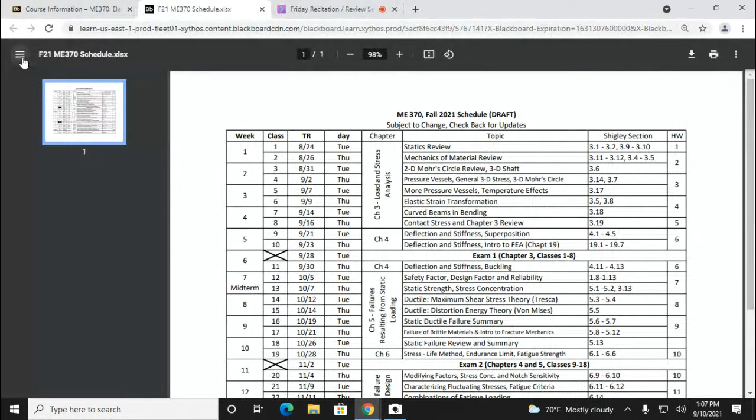Look at all those pictures of books. That's fun. I don't know if I get credit for that. Do I get credit for, is that a credit type of thing?

Right here is our schedule, so I've been sticking closely to this. Our first exam is scheduled for Tuesday, the 28th. What are we today? We're like right here, right? So it's several weeks away. It's only going to be on chapter 3.

We just started talking about elastic strain transformation and we're going to do curved beams. So next week is really curved beams, contact stress might be a short thing. And then deflection and superposition, and we'll start using FEA right here. So that's where my plan is for it.

And we'll use the review session that's right here on the 24th. That's going to be the exam review session. We might get a different room so that we can make it longer, because I think more than an hour is needed.

I won't pull any punches, people bomb this first exam. I mean, just historically. I created this review session because I don't know how else to address this problem that I know exists, and I really want to. I'm very highly motivated to fix what I see as something that's broken. So we got to work together to try to do that. And the number one way to do that is to solve problems.

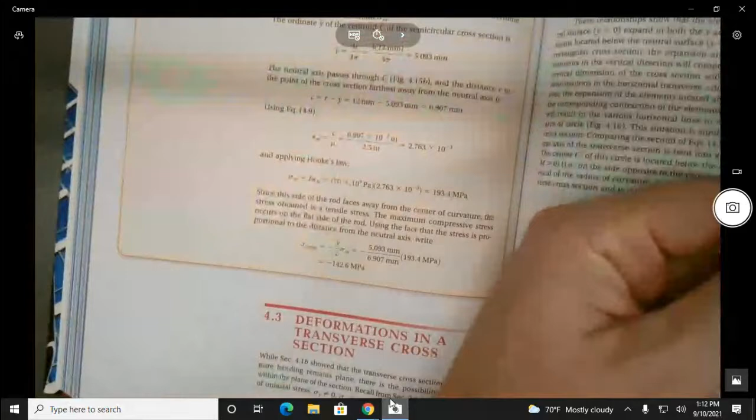I'll find a problem, and this is something I'm doing with a purpose in mind. I'm randomly looking for where that part is in Beer-Johnston, this is just an awesome textbook right here, by the way. Dave Mazurek, I know Dave Mazurek. Name dropper, that's what I am.

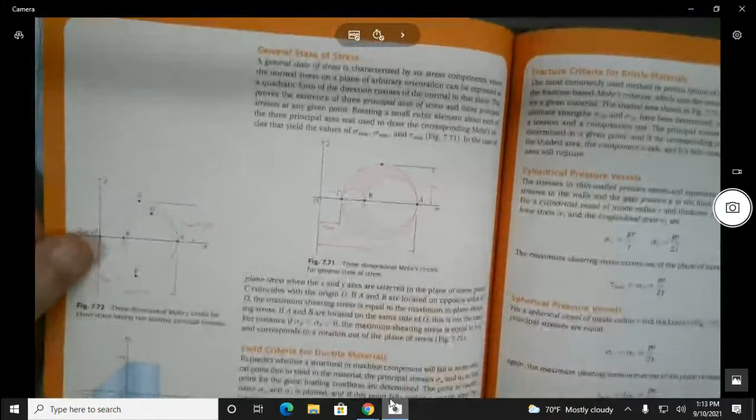Okay, let's see, it looks like here is a Mohr Circle problem. And here's where they actually talk about 3D Mohr Circle. So isn't that something else? So let's see, let's find us any more problems. They got problems in the back here.

Let's check them out. Here's one right there. They're trying to determine the value for which the maximum shearing stress is, but they're going backwards in a problem like that. We don't need to do that.

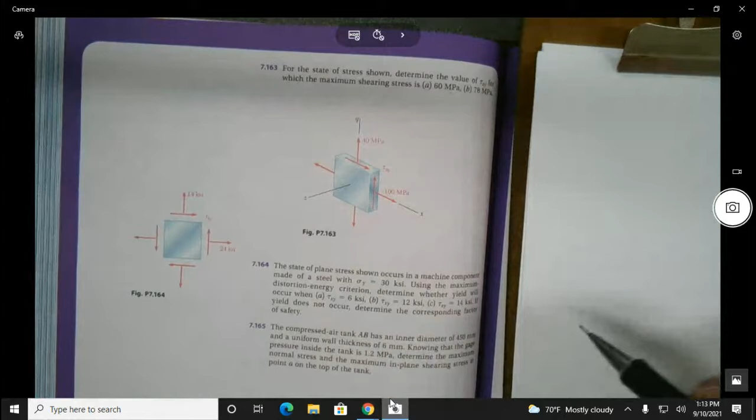Let's do a different one here. The state of plane stress shown occurs in a machine component made of steel using the maximum... oh no, that's chapter 5 stuff for us. So let's go a little earlier and just pick out one.

We could actually just make up values if we wanted to, but for whatever reason they're doing something in some of these problems where they're working backwards, which we don't need to do. All right, so here's one right here, just because I don't feel very creative today.

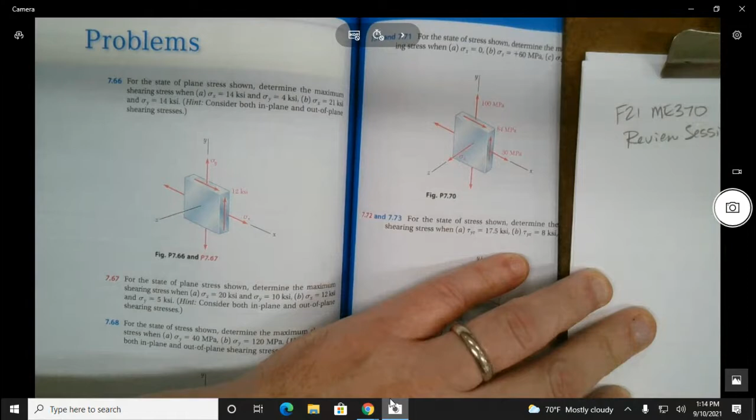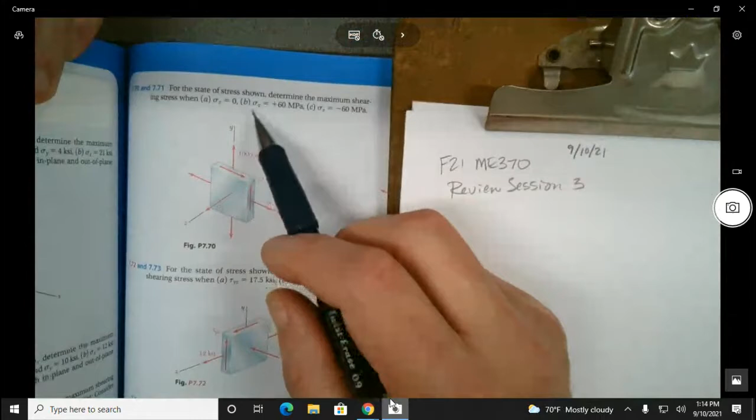For the state of stress shown, determine the maximum shearing stress when sigma z equals zero. Oh, this is interesting. They're doing the 3D Mohr Circle thing right here, with these three different scenarios. Okay, that's good, I like that.

So they've decided that we have this one right here, and they decided to give us this weird looking figure right here. Well, they decided to make it that way.

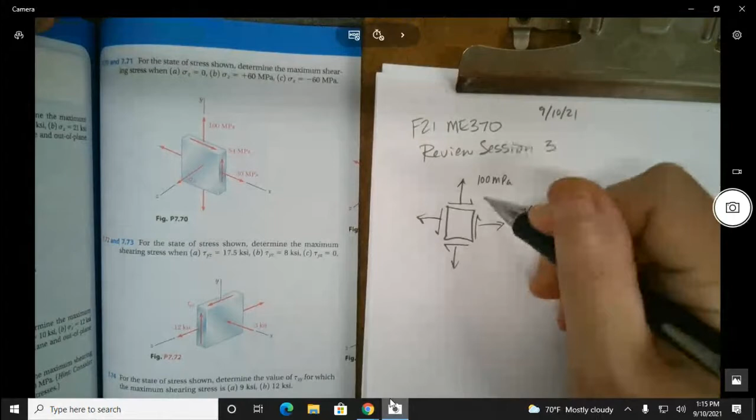100 megapascals, and here is 84 megapascals. And they also said for part A, the Z direction is 0. For part B, the Z direction is equal to 60 megapascals, by which they mean tension when they say positive. And then C is 60 megapascals compression.

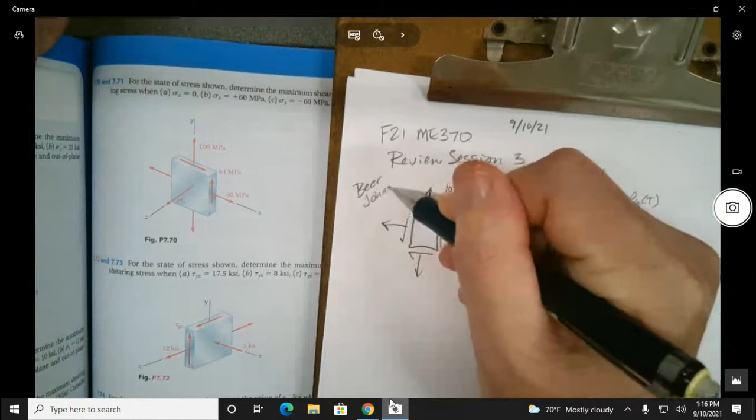This is Beer Johnston 7.70. You do that because honestly, I keep these things and go back and think, where did I get that from? All right, so we'll use the handy dandy ruler.

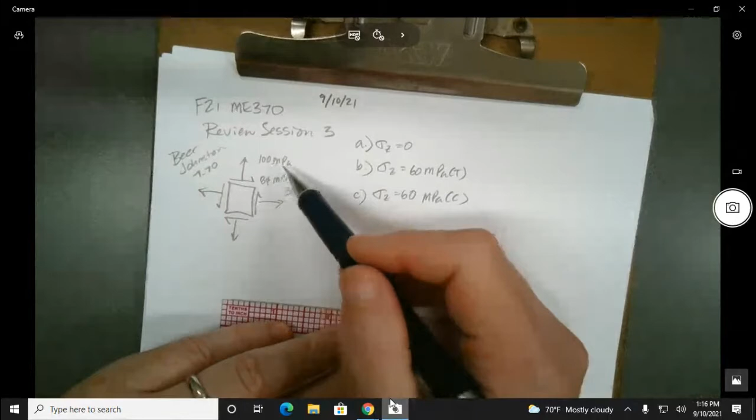Why not? First off, I'll make a nice straight line, and we got 100 as their largest one right here, so I don't want to use the whole page for 100. Let me go like this.

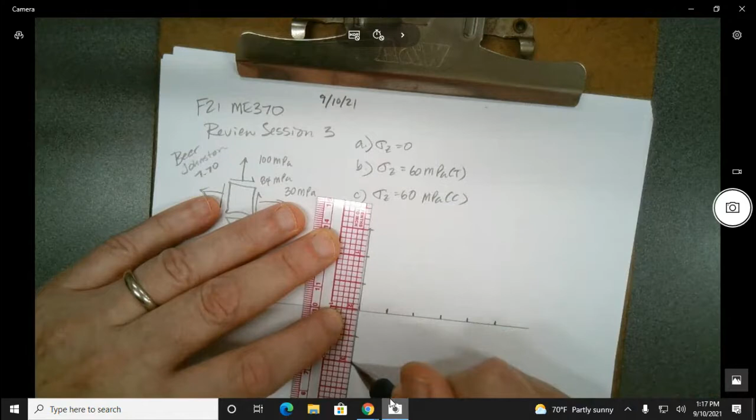I'll go 20, 40, 60, 80, 100 right there. I think I got that right. I didn't make this very perpendicular to each other, so there's 20, 40, 60, 20, 40, 60. I think we'll be okay there.

Although they have 80, don't they? Yeah, I might have messed up by making that so low. We'll just do our best, because this is 84. Let's see what happens.

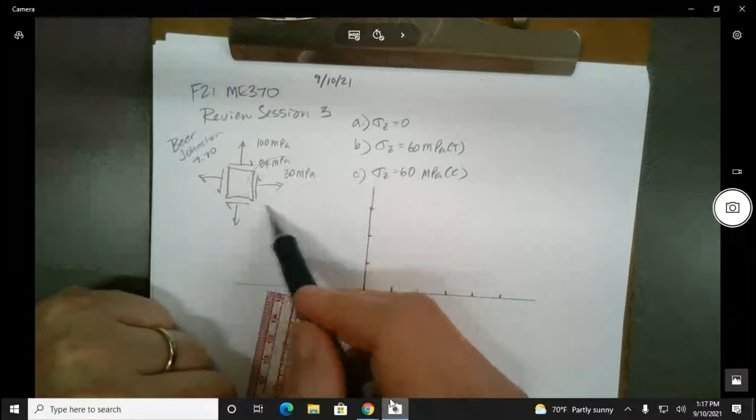All right, on this first face right here, we want to plot that. So we take 30, which is going to be right there, right? And 84, and the 84 is going that direction. So onto this one, let's see, here's... as I mentioned, I should have probably gone out a little before.

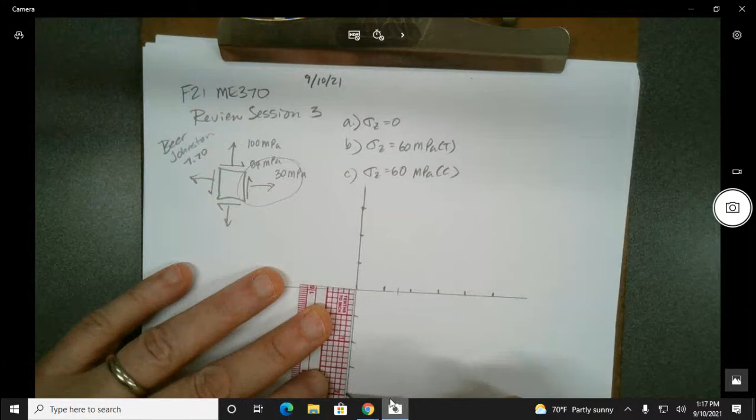Let me see, 20, 40, 60, 80, 100. So 84 is like right there. I'm sorry, right there? Is that okay?

Okay, and then on this other face over here, we got 100, 84, right? So here was 20, 40, 60, 80, 100, and 20, 40, 60, 80, 100. That's kind of ridiculous right there at that point, but okay.

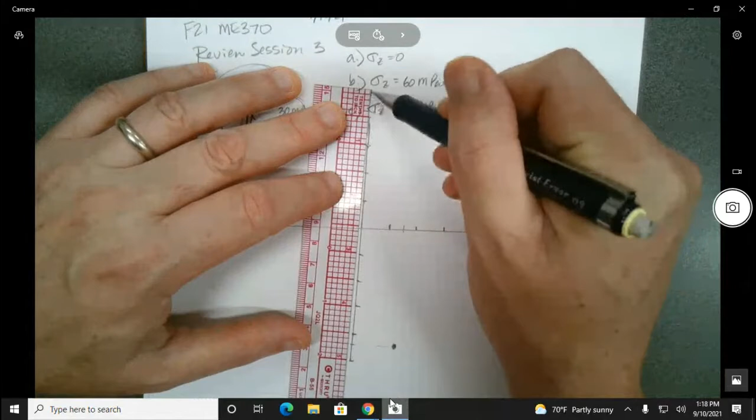Oh, actually, I probably did that kind of bad, right? So it should actually be a little upper, because halfway through would be 90, so we probably go like right there, yeah. So this might be a little better, I don't know.

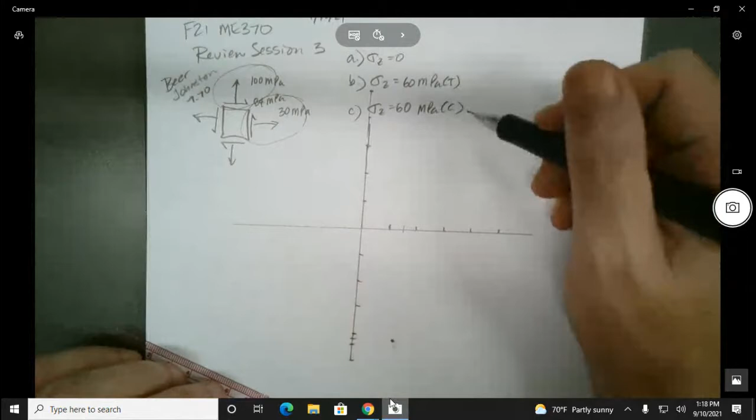And this one over here is going to go and be up here somewhere. There would be 90, so maybe right there.

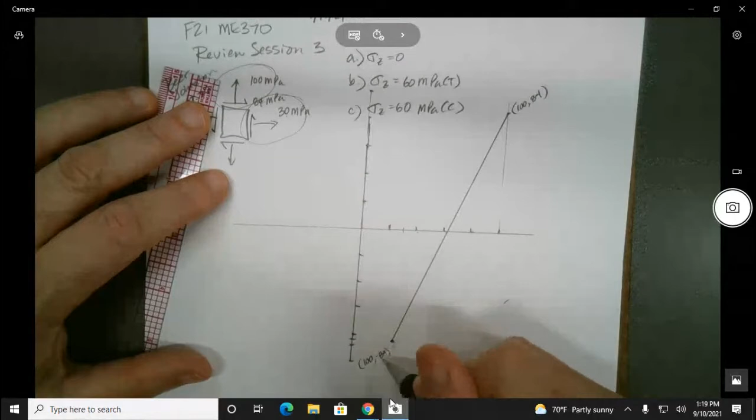So yes, this should be 100, 84, and this is 100 and negative 84. Not 100, that should be 30. Thank you, keep me honest.

And I guess I can attempt to use my... it's a little, kind of a better one than some of the others, but this is like loose right here. It really kind of messes with me.

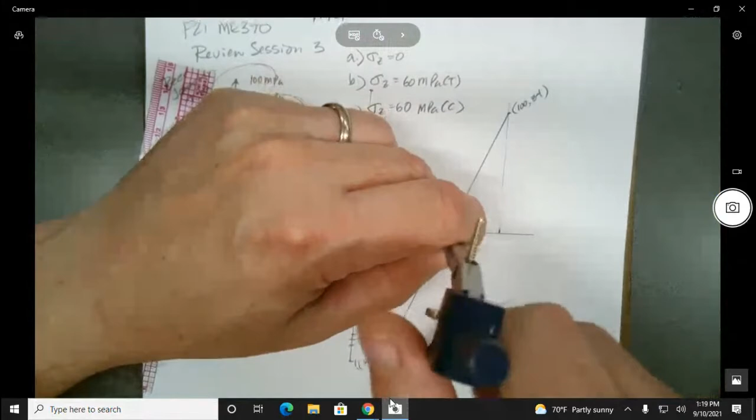And what's 100 plus 30? That's 130, and half of that should be what, 65? So I should have landed, the center should land at 65, so I can kind of show you how bad my improvised graph paper here. Didn't do a great job, but here.

So there you go, we made a Mohr circle. And we could extend this thing out here. I really should have probably used some engineering paper, right? That would have been better.

But let's go for the center of this thing first. The center of these points is going to be 100 plus 30 divided by 2. Let's see, so we already said that, 65? Yeah. Now the radius of this, okay, so we got to pick a spot for the radius. Here's C, let's get a label of that.

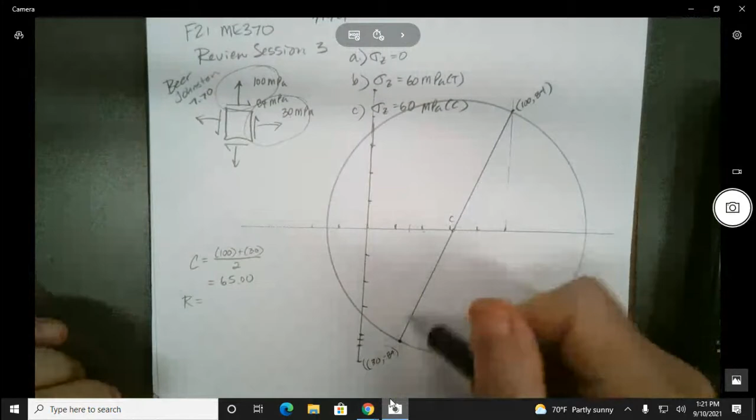I'm going to pick this guy right there as my radius. So this length right there is going to be the center, 65, minus 30. That's going to be that length right there. And then it's just going to be this high, which is 84 squared. 65 minus 30, I could do that in my head. It's 35? Okay, you have to double check for me though. John, math.

All right, so I get that that's going to be 91.

So my sigma 1, sometimes I call it, well maybe I'll call it sigma A. We'll call it sigma A. We'll keep doing that here just for a second because I might want to mess with that right here. Is going to be C plus R. So whatever that, 65 plus 91 is 156 megapascals. That's going to be tension for sure. So that's that guy over here.

Just have a question, quick. If you found the radius for the other side, the center point would be 100 minus 65? Yes, okay, yeah absolutely. Yeah, this leg would be 100 minus the 65. You do either one, doesn't really matter.

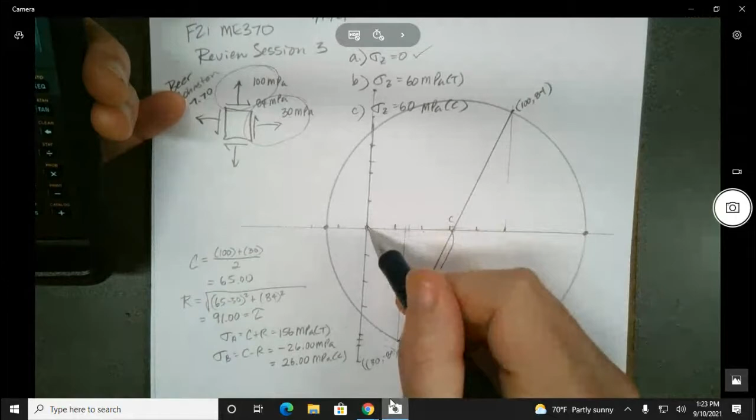Now we have to do the 3D Mohr circle aspect of this, right? Now that we got the principal stresses, we also know that this right here is going to be tau. It's this in the first case up here. This ends up being sigma z equals 0 right here, one of the principal stresses.

So we have that guy, and then, wow, actually feeling pretty cocky. No, wasn't great. Started off, it felt pretty good when I got to right on there. I started feeling like my circle skills were doing okay, but then it all fell apart.

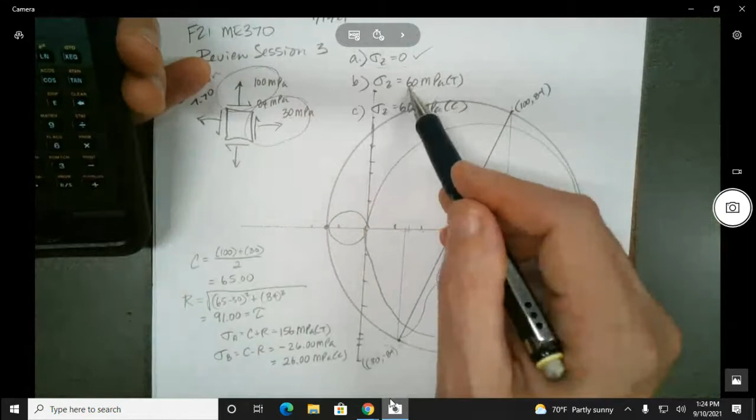So that would be this first answer right here. Now we have another one here where we have, okay, so 60. What if 60 was something that was happening in the z direction?

And so probably the thing we care the most about when it comes to what's going to happen here is what the absolute maximum shear is going to be. And in this situation, it's the first one, it's going to be this guy right here, abs max. And that's just equal to the radius, that's going to equal 91.

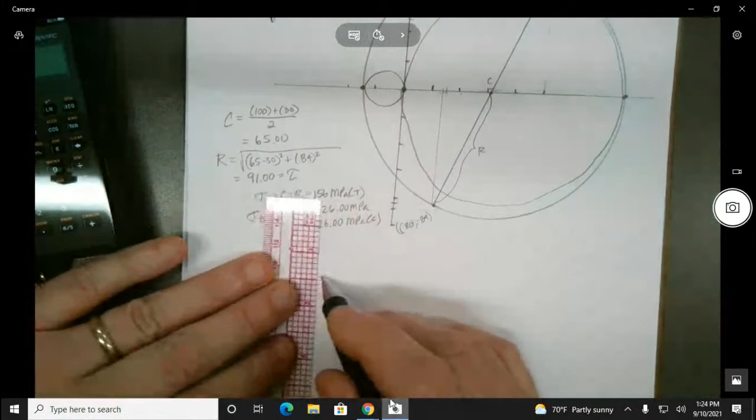But now we have these what-if things for B and C. So I'll just draw them below. All right, so we have all of the same stuff. The principal stresses are still going to remain the same, sigma A and sigma B. Now let me see, I'll draw it a kind of smaller version of the thing.

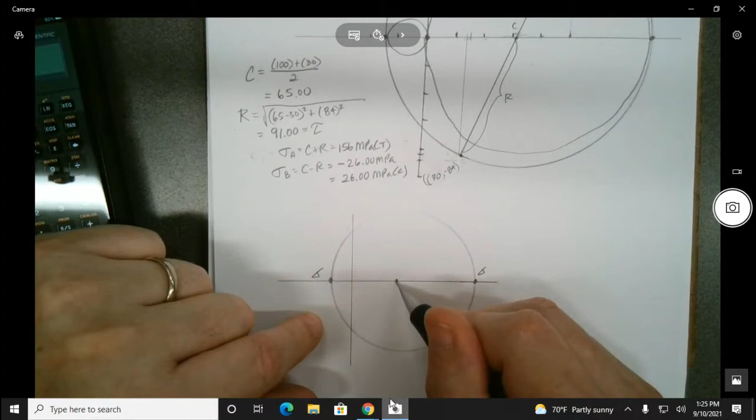So now we're going to say right here, and I'm just going to try to mimic what we had there, something like that. So I guess I'll use another piece of paper here for the other one. And so we still have this guy and this guy. But now, if the other principal stress is 60, it would look pretty close to being right there. I'm just estimating, this was like the center of this was 65, but now this is like right here, so we would have a Mohr circle.

If it'll let me do this. Let's see, I'm gonna do my, oh it's doing that thing where, I hate that. No. I'm eyeballing this. Eyeball engineering. Ah, I messed it all up. Let's pretend it looked okay. We'll do pretend.

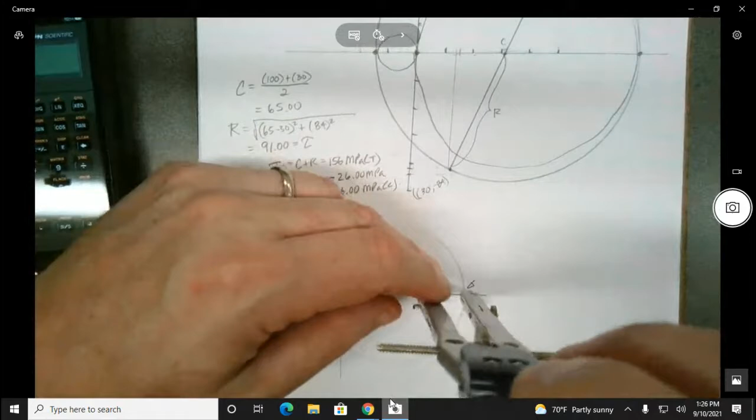All right, so now this is sigma 1, this is sigma 2, and this is sigma 3. Sigma 2 would be that 60 megapascals in tension, right? So this guy was the 156, and he would be the 26, right? Yeah, 26. With these compression over here. Not any big difference. And the tau abs max, still the same.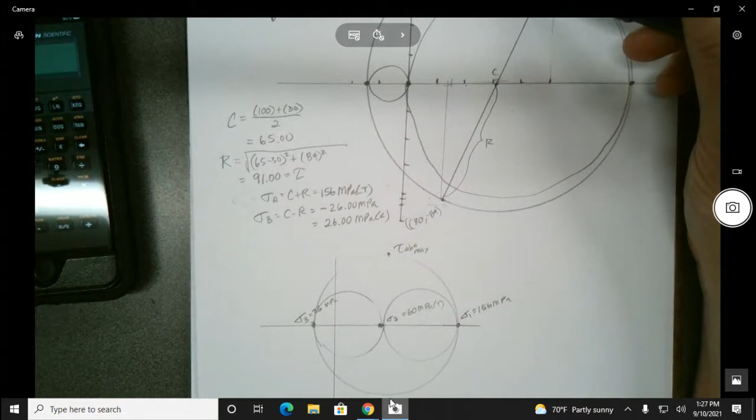But now for this other thing that they were talking about, I'm sorry. The other situation where we have 60 is the out of plane, that's compression, right? You can't quite see it.

Let me see if I'll go. I can't go up any higher. Yes sir. Okay good, then tell me.

And then the 60 from this new part. Yeah, they're just coming to the typical situation that we're going to almost always have, except for when we're dealing with a stress element that's on the inside surface.

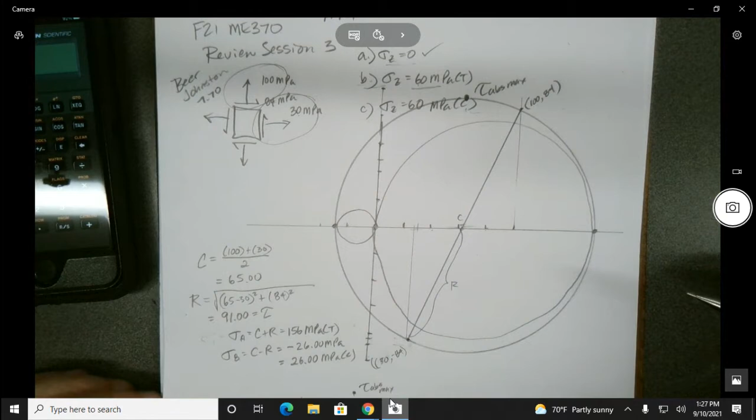I understand what's happening now. Yeah, okay, I just picked out a problem and said, oh, look, they gave you some more scenarios. You chose to use the 60 megapascals in tension? No, in this one down here, and then the first one uses A. So we're going to do a third one, because I thought that's an interesting one, since that's a situation that could possibly exist.

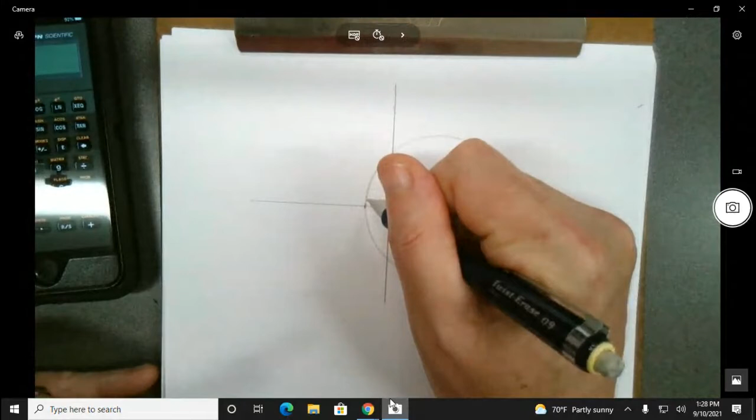I don't know where it is necessarily, but let's see, I think I'll leave enough space for myself. Let's say this is the situation there where we have, this is still going to be the 23 we got, oh no, 26 right there. And this is the 156. But now all of a sudden we have another principal stress over here that's going to be 60. So now we'll have a principal stress, something like that. And then eyeball this, see if I can... it's close, all right.

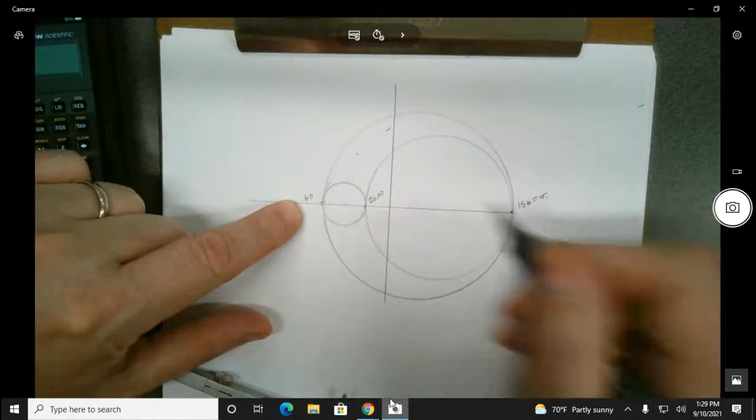So then our principal stresses are going to be: this will equal sigma 1, this will be sigma 2, and this is sigma 3. But sigma 3 is this. So tau abs max is by definition sigma 1 minus sigma 3 over 2. Sigma 1 is 156, sigma 3 is negative 60, divided by 2. So 156 and 60... I think I did that wrong. 156 and 60, there you go, is going to be 108 megapascals because it's going to be up here.

Does that help at all to sort it out? Yeah.

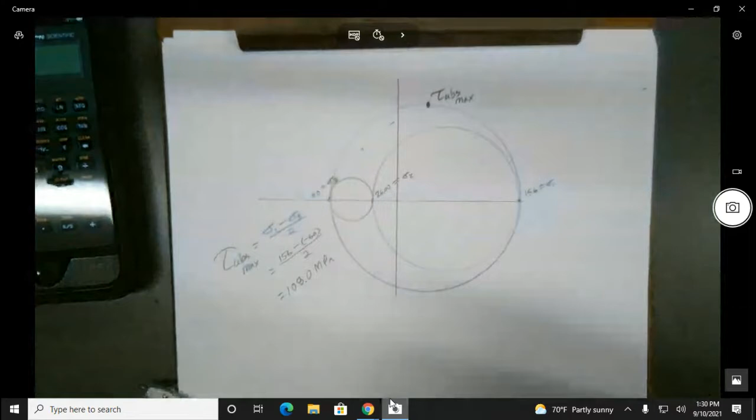What's good with this is how my roommate and I got A's in engineering problems. First off, he was a very competitive guy, so we'd make a competition out of it. We'd go to an empty classroom at night, since they left the buildings unlocked — I don't think they do that anymore. We'd have some chalk and chalkboards, and he'd say, okay, we're going to do this problem, and we'd race to see who could do it, and we had the answer in the back. You don't have the solution, but you have the answer, and we'd see who could get it, making it a competition. The person who got it right would try to explain it to the other, and then we'd argue about it. He really liked to argue. Between the two of us — and by the way, I wouldn't say we were best friends, we were probably friends later in life — but we definitely pushed each other.

So I'll say 7.70. All right, so it's not giving me what I want. Oh no, okay, the problem asked for the absolute maximum shear. Yeah, so it's the correct answer. They had 91, 91, and 108. So 91 was our radius in both of the first two, and 108 was the answer. So we got the right answer.

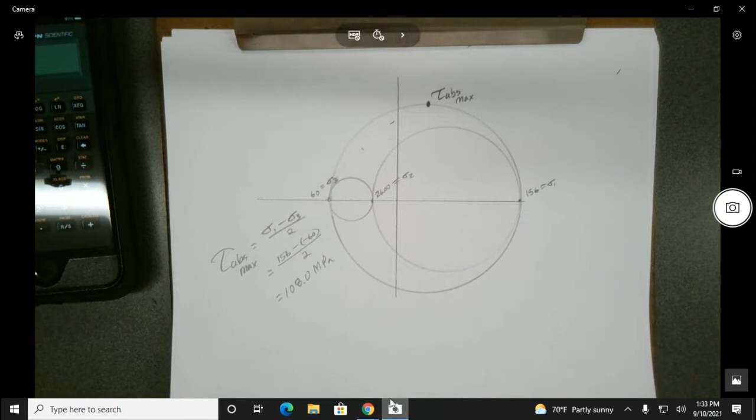So coming up with a fresh problem. And also, the fact that Andy Busk and I would challenge each other, right? And it's the challenge that helps you. And boy, doesn't it feel good when you just know it, you know you did it right, and it feels terrible when you thought you did.

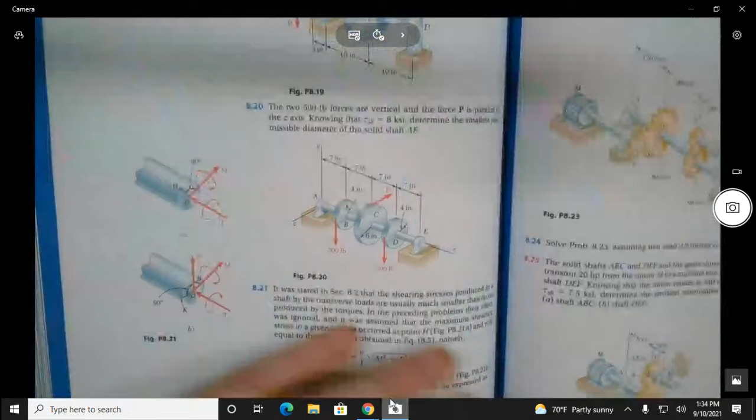All right, so let's take a look at a shaft problem. They have shaft problems in here. Sometimes they're hard to find, so I don't want to waste too much time flipping. But I think I saw one right there, and we could invent some of this ourselves. This one might be too hard.

Yeah, but here's one that's a little easier, or here's one a little harder. Which one would you like to do? Do the easier one here. We haven't done connecting ones yet. I mean, we did them in strength of materials, but not here, right? Not in here yet. Yeah, we haven't drawn what that should look like, but I could teach you what that would look like, right? Depending on which one's driving. But so we're going to do this guy right here, which is problem 8.20.

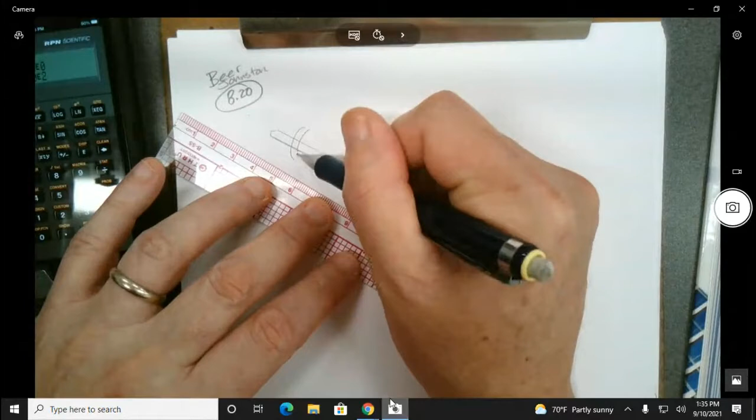I can't write on the left. I used to just not even write on the back of the keyboard. Let's see, I'll try to be a good role model here, because I'm seeing some people that need to do a little bit more careful drawing. I'm not liking my own drawing right now, by the way, so I kind of psyched myself out, I think. Yeah, that was lame, that was awful. Don't be like me, kids. Be better.

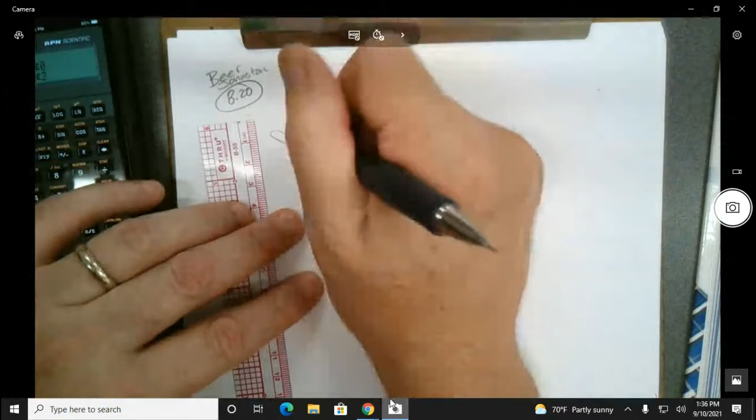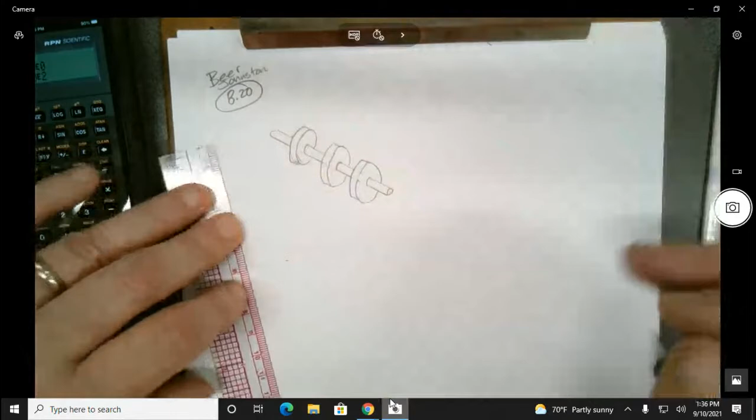I think for both of you, I put a note on their homework to ask you to please do a better job scanning. I would recommend a different app than what you're using. I don't know what you're using, but I know. Yeah, like the quality? It's just, I also attached, and I probably do this with most people, attached mine. Said, hey, I just used the scanning, I used my iPhone and scanned it with the thing and was able to get nice crisp lines, right? That you could see, there's no doubt of what it is. Just compare the two and try to mimic the same thing.

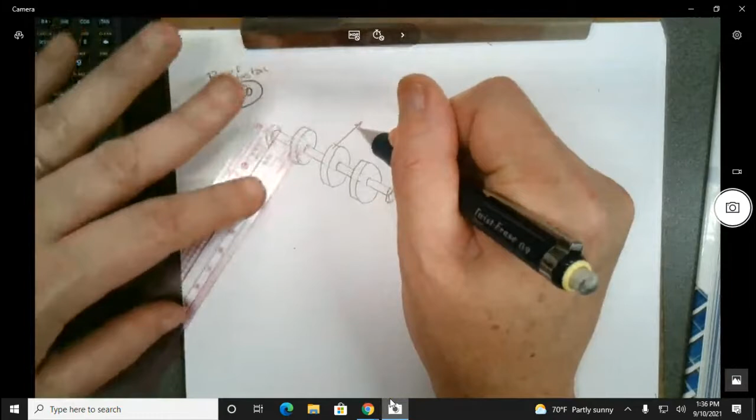Okay, so I spent too much time making this thing up, but it would really be helpful to me because it's the interface that I use to grade. The resolution gets a little bit reduced, and if I have to zoom in, I can't post a note onto the thing. So it's like I gotta zoom in and then zoom out and then zoom in. It already takes me forever to do.

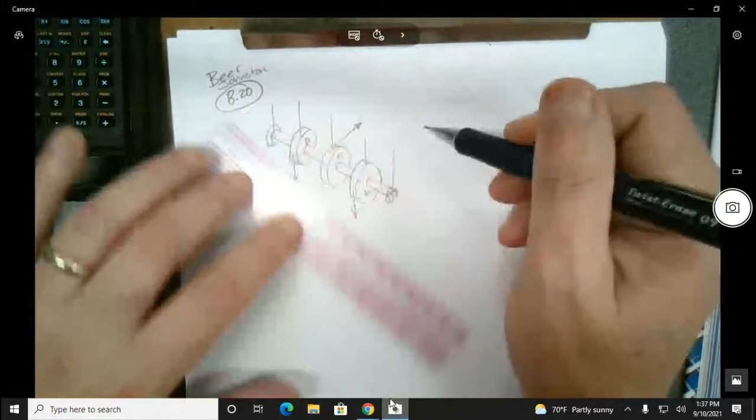So, okay, this is B, and this is D, and these distances right here. Oh, one more, it's going to be 7 inches, I'm just going to write 7, they're all 7, use a little inch symbol. This one has got a radius of 4, and this one has a radius of 6, and this one has a radius of 4. Anything else? This is 500 pounds, 500 pounds, and P.

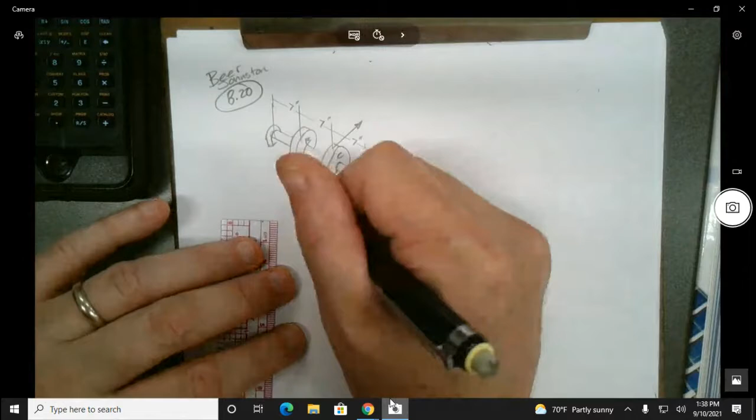Good, they left one out. And they say that the shaft diameter—they tell us this, no, they want us to determine the shaft diameter in this problem. So let's work backwards in this. This is problem 820. I don't know if they have the solution to this. I do have the solution manual to this book somewhere. Probably not. Sometimes I'm just looking right here. I see some that they kind of have random amounts of problems. I see even. No, they do 1.578.

D is equal to 1.578 inches would be the answer. But they said that the shear allowable was 8 KSI.

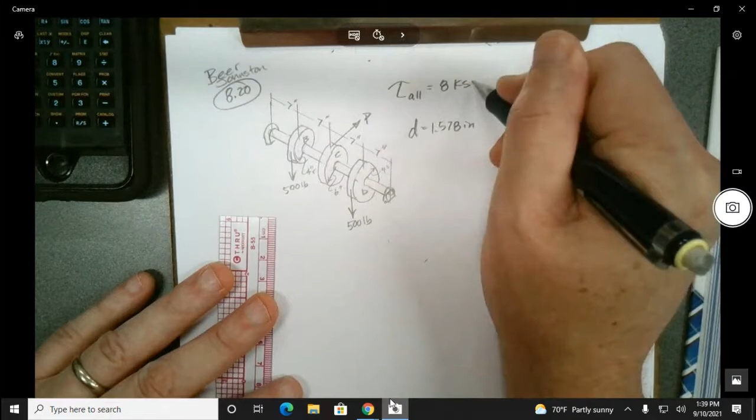So they're actually using maximum shear stress theory as part of this. But so we have something to work backwards to for what we've been doing. We haven't done the design aspect, we're working backwards.

So the first thing we want to do is figure out what that unknown force is going to be. Let's draw it down the center here. So this guy is P, and we have to draw them on top of each other because they're the same diameters, 4 inches and 4 inches in radius.

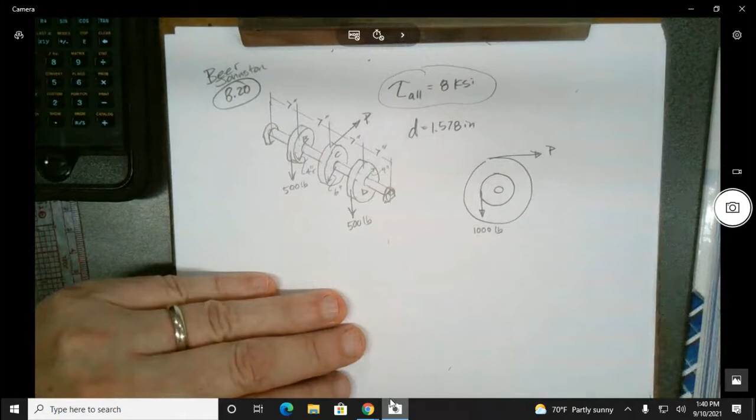So we'll call it 1,000, since they're laying on top of each other. In the real world it would be smart to just label these R. Did they give us this as X? That should be X, X should be Z, and it should be Y right there. So this is R-Z, and this is R-Y, and they're just space holders because we don't know the value. But we do the summation of moments about X equal to 0.

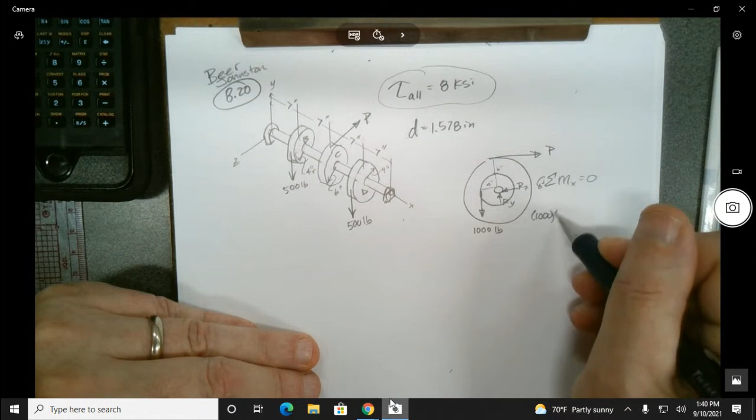And this radius is 4, and this radius is 6 inches. So we just say 1,000 times 4 minus P times 6 is equal to 0, and P should be 666.6. And we're in pounds.

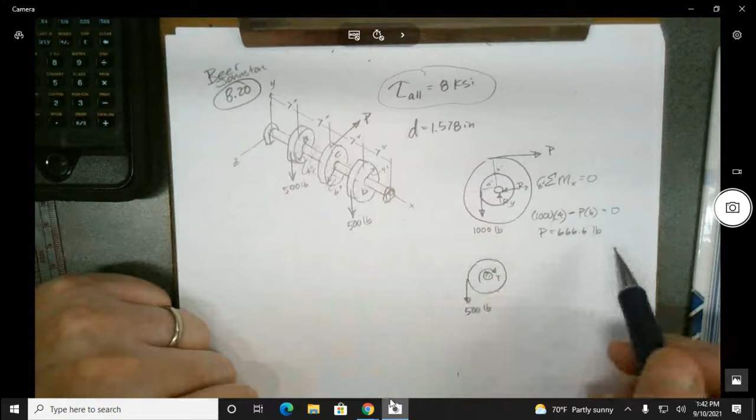While we're at it, it might be smart to figure out what the torque is going to be. This will be a little interesting, so let me think my way through. I think regardless of what you have, that's going to be true - whether you split it here or there, it's going to have the same torque. Because all we really need to do is cut it someplace, but we have the 500 right here, and there's going to be a torque that goes this way, right in between the two.

So moment about the X: we go 500 times 4 minus T equals, and T is going to be - 2,000 inch-pounds. And if you did the same thing over to this one, it would really be the same diagram, basically. You'd just be looking up through the gear or pulley or whatever this thing happens to be. So we needed the torque, we need this.

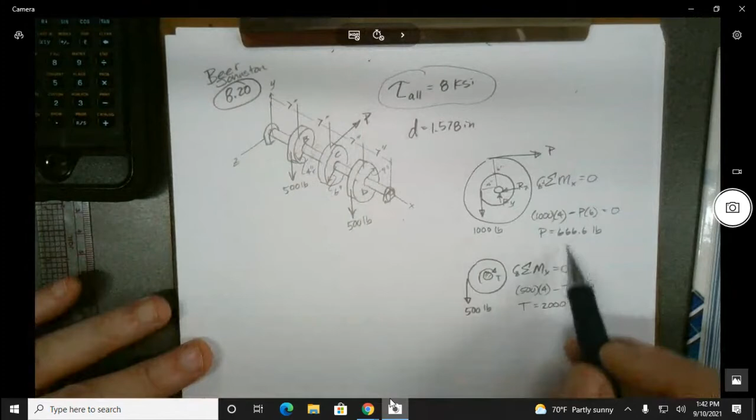Okay, we're going to go. Now let's do two diagrams of this thing.

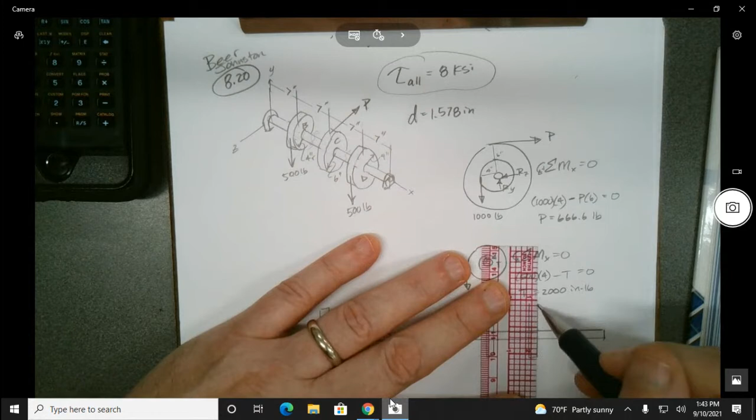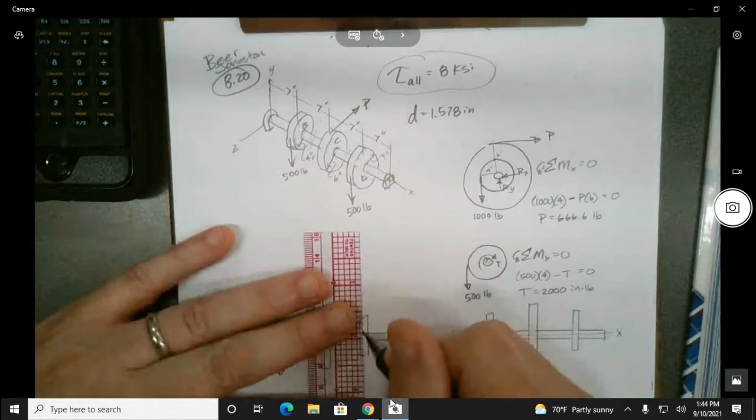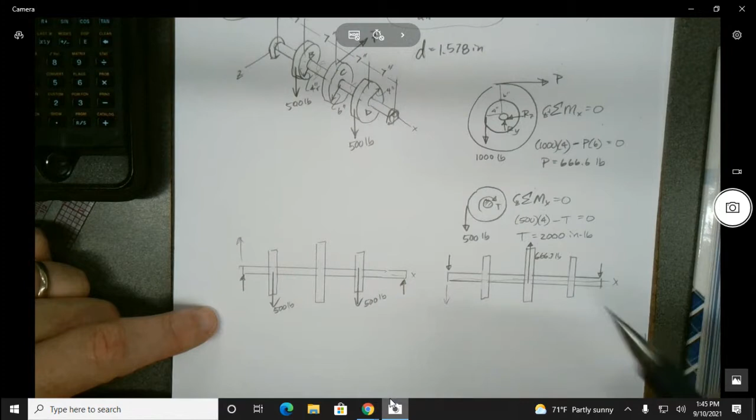So let's say this was 666.7 pounds, that guy right there - I didn't leave enough room in between there. Because of symmetry here, it's really easy to get the reactions. But I found a number of people not getting the correct reactions, and it's a really important skill. So if that happens to be you, make sure you're testing yourself and figuring out why you got it wrong - maybe a misconception or just a silly mistake - and try to fix that.

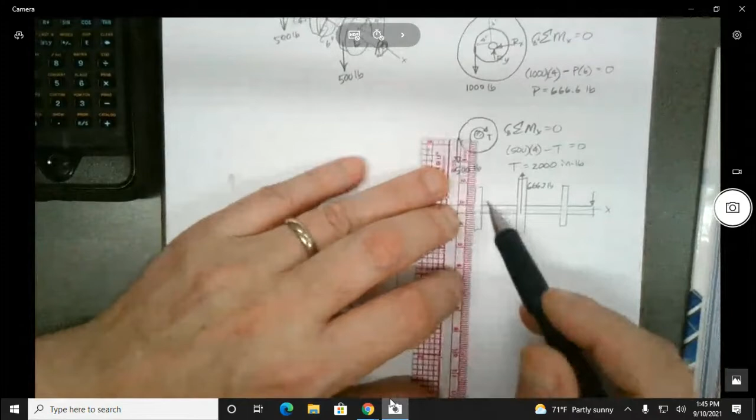Yeah, the concept should have gone away at this point, right? Yeah, well, you hope. Well, the crazy little boys' school I went to, it wasn't. There were women there too, but it was mostly men. It's really sort of like Lord of the Flies, to some extent.

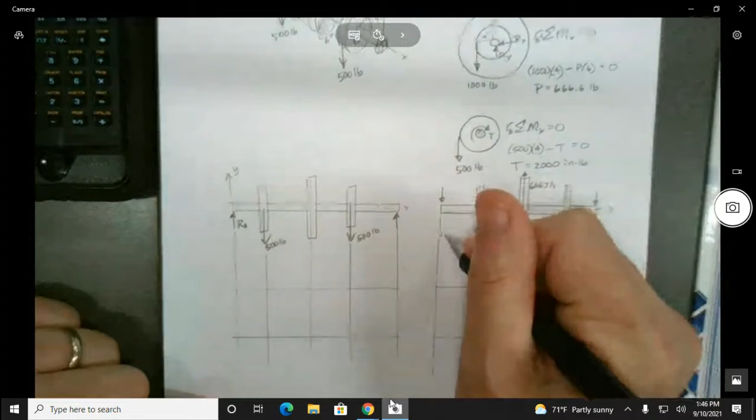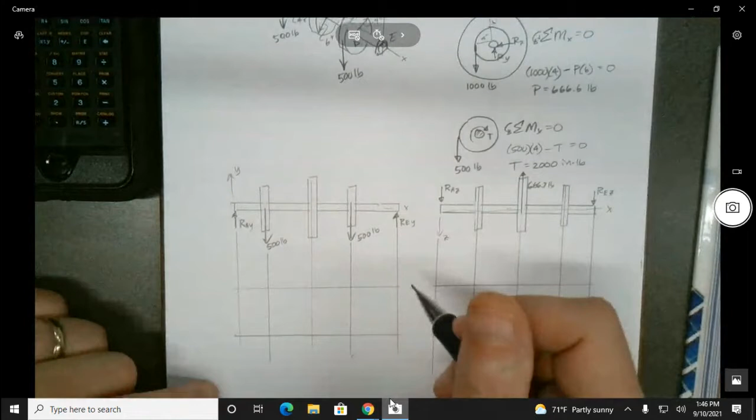People would get angry when they found out that somebody had really aced an exam, because then it busts the curve, right? Everybody's relying on a curve, and it's like, who the hell did that? Let's go try to find the person that made the high grade. You're letting everybody down, you know. That's not fair to everyone else that you do so well on an exam. It doesn't make a whole lot of sense. You really are, how self-centered are you?

We had all kinds of things where we'd have to demonstrate class unity as freshmen and do little spirit events and that kind of thing to try to earn the privileges. Like some of it was soda privileges, there was also flanking privileges because you had to square every corner when you're inside going down the hall. You had to walk 6 inches away from the wall, which is referred to as a bulkhead because everything's a fake ship. So if you're going someplace and you have to turn, you have to do that everywhere. But if you do enough class unity events, several months in, you're allowed to go like this.

It made things a lot faster. You weren't allowed to drink soda, but then you get soda privileges, all kinds of things. Oh yeah, telephone privileges, all kinds of things. But you had to earn class unity, and it was not being a good class unity person by doing well on the exam because you hurt your classmates. That was the stupid logic.

But anyway, we'll go ahead and say that we know that's 500 pounds and that's 500 pounds, and that this is 333.3 and this is 333.3. But make sure that you can do that.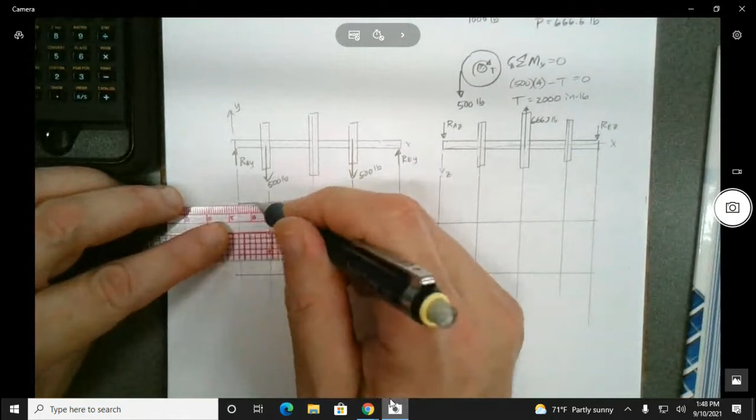So this is interesting because it goes right here, so this is coming up. We know that RAY is equal to 500 pounds. It just has to be, right? There's no way around it. So it comes up 500, but now it goes 0 all the way through. And then it comes down 500, and then back up to 0, right? Everybody see the logic?

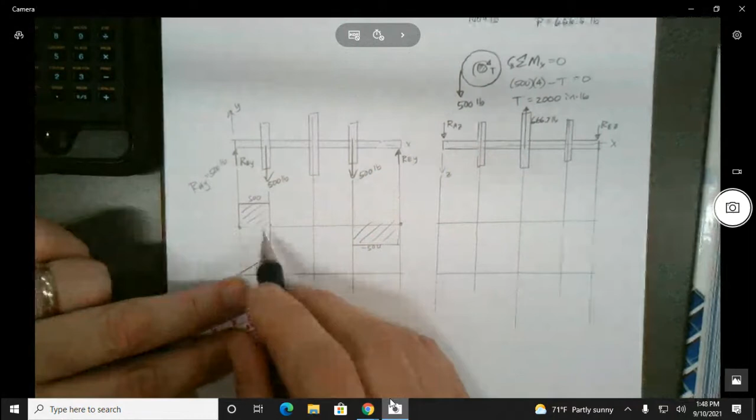So for this, it's going to come up, it ramps up to right here, and this distance is 7. So it's 500 times 7, which is 3,500. We'll put the V and M that are there, and this is a pound, and this is an inch pound.

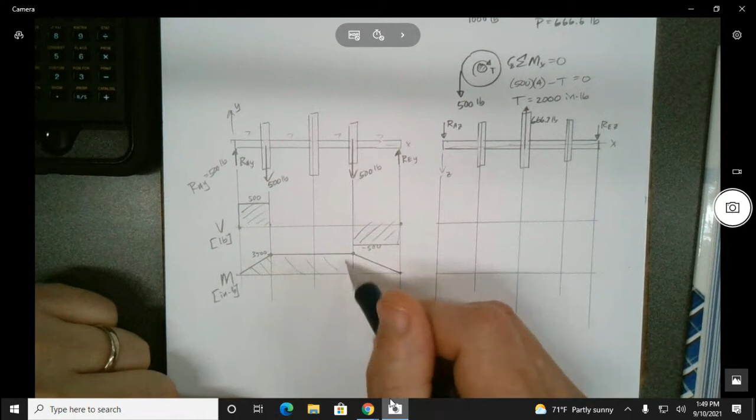So you can see what happens here, right? So you ramp up here to this, and then nothing happens, so it stays constant all the way along. And then this right here is a negative area, so it brings it back down. So it's pretty easy to figure out that it's 3,500 at each of these spots right here.

But now on here, this one goes down 333, so we know that this is 333.3. But then it goes up 666 this direction, so this is a negative 333.3.

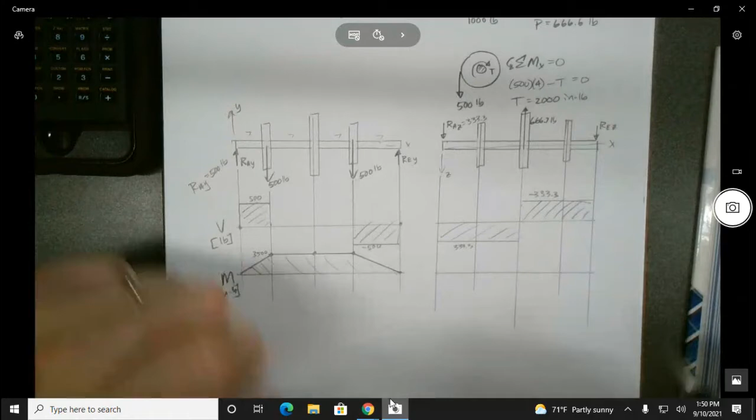Yeah, because Z is, because we're looking down upon this one, the Z is pointing that direction. And so we're going to get a slope.

So this is going to be 333.333 times 7, you get 2,333. But the more important one, we're going to have times 2, right? Or 333.333 times 14, so we get 4,667.

Thank you. You're welcome. Best of luck. Recruit well if that's where you're going.

So you can see that we suspect there are 3 separate spots where there could be the maximum stress. So, but right here has to be the worst one right there, right?

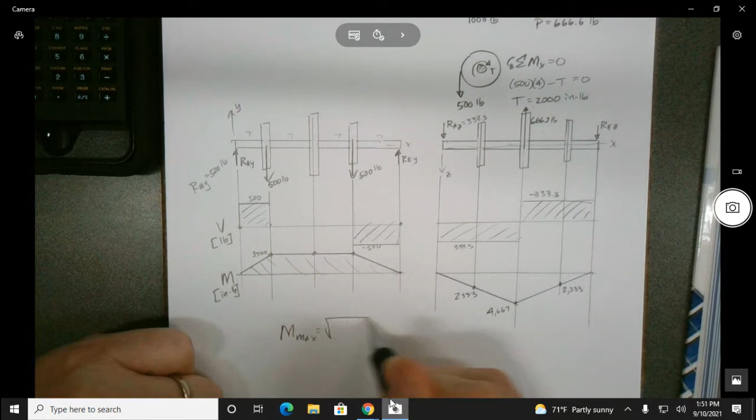So the maximum moment is going to be 3,500 squared plus our 4,667 squared. Let me see, that's already in the calculator, so I'll square 3,500, add them together, square root them, we get 5,833.33333333 inch pounds.

About 10 minutes from now. Talk to you soon.

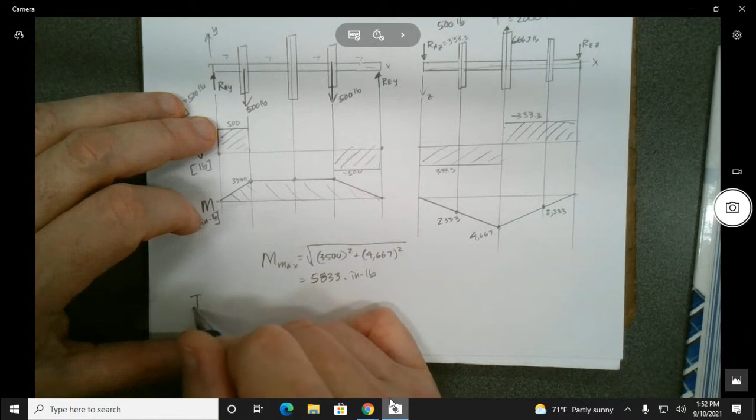Okay, so we have I, pi over 64. Let's use 1.578 squared... where did pi go? Pi times 64 divided. Well, not squared. 1.578 to the fourth, and we're going to use that.

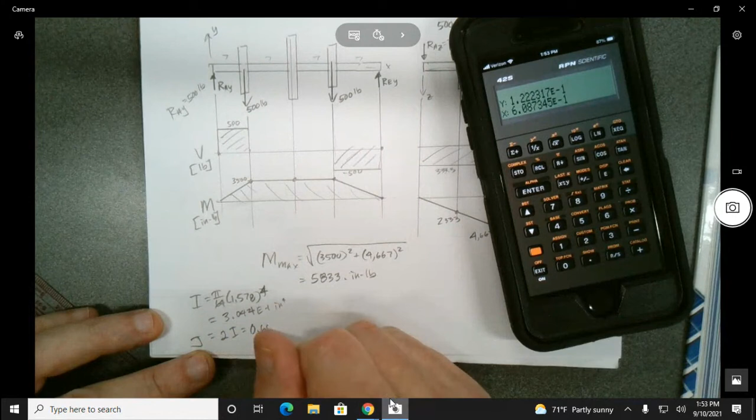And then take pi times that, and 64 divided, and I get 3.044 e minus 1 inches to the fourth. And so J is just 2 times that, so we get 0.6087 inches to the fourth.

So the stress is going to be MC over I. So we'll take our 5833 and go 1.578 divided by 2, divided by 0.3044 equals... 5833, 1.578 divided by 2, times 0.3044, divided, and I get 15.12 KSI.

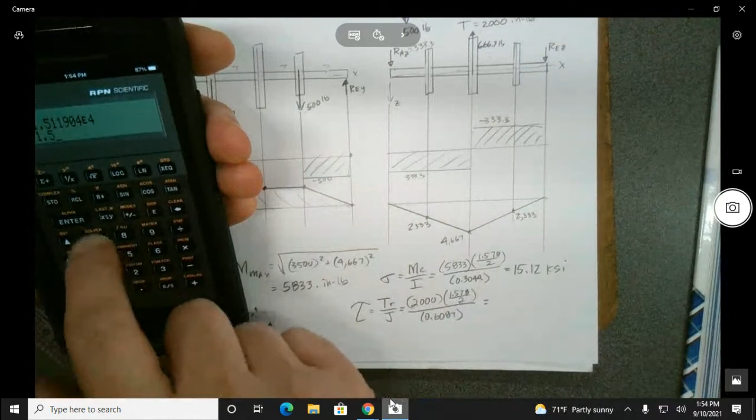And then tau, TR over J. We found previously that we had 2,000 and 1.578 over 2, 0.6087. So we go 1.578 divided by 2, boom, 2,000 times 0.6087, divided, I get only 2.592 KSI.

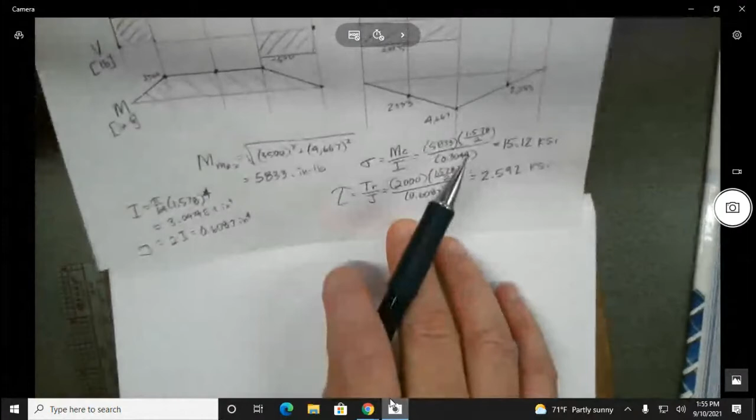So now we're hoping we have a Mohr's circle that we will make here, where it doesn't matter which side we go on.

We'll say that the center is going to be 15.12 divided by 2, so 7.5 looks like 60.

And R, this one is the easiest one. Didn't do a very good job of making a little bracket thingy. So there's 7.560 as one of the legs, and the other leg is 2.592. I think this should come out to 8, if I did it correctly.

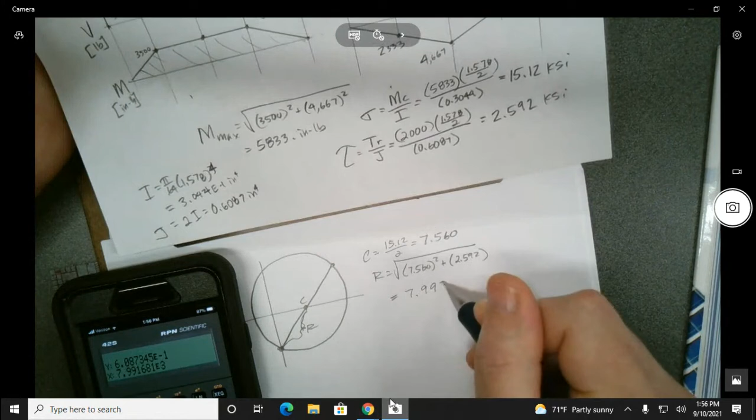The moment of truth, drum roll please. Boom. Yes! 7.992 KSI. So that is satisfaction, that's the tau max. We did tau all. Yes. Okay.

But hopefully this might inspire someone to attempt to do this thing that we just did. Look at the book, look at the problem in the back, what's the arrangement, how to solve it. In this case I flipped the arrangement, but it might be a problem in Shigley. Shigley has the answers for some selected problems.

Just test yourself, push yourself, and by way of doing that, you're carving that path. You really are. It's the most efficient way to study. It might seem like, oh man, that's so much extra work, but it's the bang for the buck you get out of working through problems and pushing yourself.

And not only that, but building up the confidence. If you're not a good test taker, and lots of people aren't, right? Some people more so than others. Getting that amount of confidence, that self-assuredness, because you were able to get the same answers as the back of the book, you're not questioning whether you got it. You got this nailed, you got this down, right? But you're also exposing your weaknesses too.

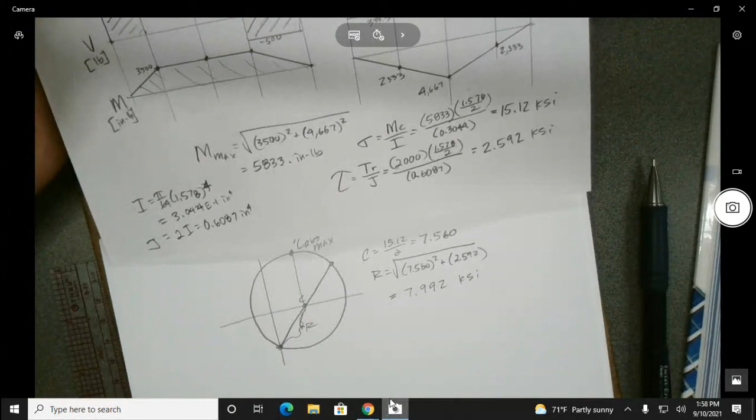So if you don't get it, because you would come to me, and I'll often say, for me, truth be told, I don't think it meant... I think I can say this safely, that my opinion of you will not affect your grade. But that's not true with every professor, okay? So doing this in every single class, you come to a professor with your worked out thing and you couldn't get the answer, and they'll be like, oh my God, yes, thank you Lord, thank you for giving me a student who gives a shit enough to actually have tried this on their own before they came to me. Yes, once again, if you do that, I'll be impressed, but that won't change.

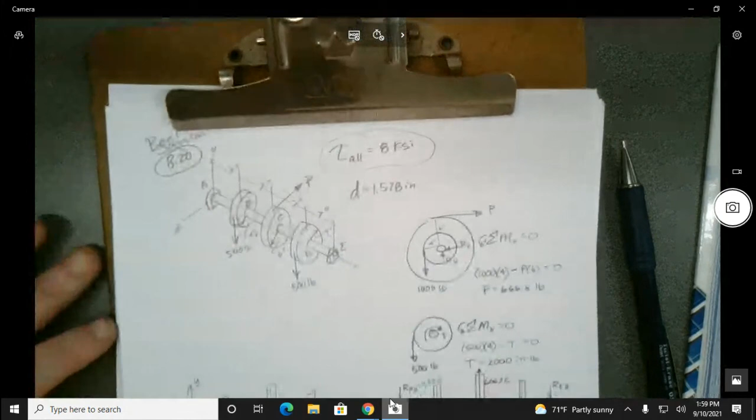But at the same time, like at the end of the semester, we have... I turn off, this is being recorded, but I think it's true on every professor. We get all these numbers, we've collected all these numbers right here, and then I look at you. Okay, here's what your overall average is. That's a C+. But then I see, oh look, on the final exam, ooh, you made a B+.

Oh okay, you turned every homework assignment in. Okay, you did bad on test 1, damn. Came to me, asked for help. You know what? Suddenly, all this average, just one more second Frank, suddenly this average looks a lot like a B plus student to me instead of a C plus, or maybe a B. You know what I'm saying? Because, yeah, well maybe I'm going to ignore him at the first exam.

I'm definitely starting to get the methods down. Like before, I was just having a little trouble with...